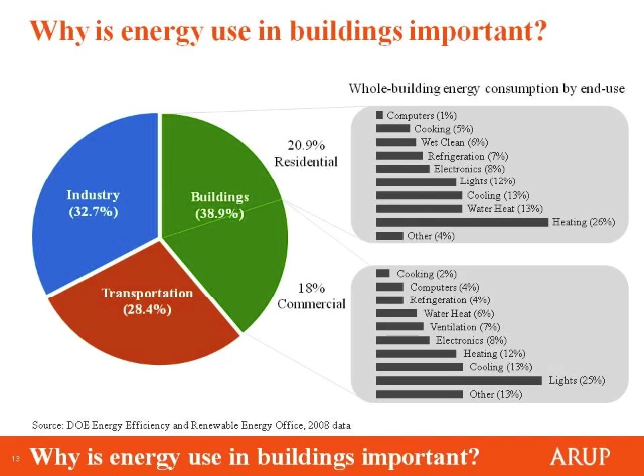So why is energy use in buildings important? Looking at it from the energy standpoint, this graph shows where all the energy is used in the US every year, and you can see that about 40% of the energy is used in buildings, and a good proportion of the transportation energy use is used getting to those buildings. You can also see there's a roughly even split between residential and commercial building use, but there's a huge difference between the way energy is used in each of the 2 building types. These are averages over the whole US climate, so some buildings are hot and some are cold.

I think you can see that for commercial space, lights and cooling tend to dominate the energy use. And in residential, it tends to be heating and the heating of hot water. Procter & Gamble actually did a sustainability study where they tried to work out which of their projects had the biggest environmental impact, and they concluded that the biggest environmental impact was actually in their washing powder. The reason was because everybody uses hot water to wash. So their plan was to figure out how to make a cold water washing powder, and that meant that although their process might use more energy, the overall energy use associated with the use of their product would go down.

So you have to think a little bit about where you can make a difference, and who and how can make that difference.

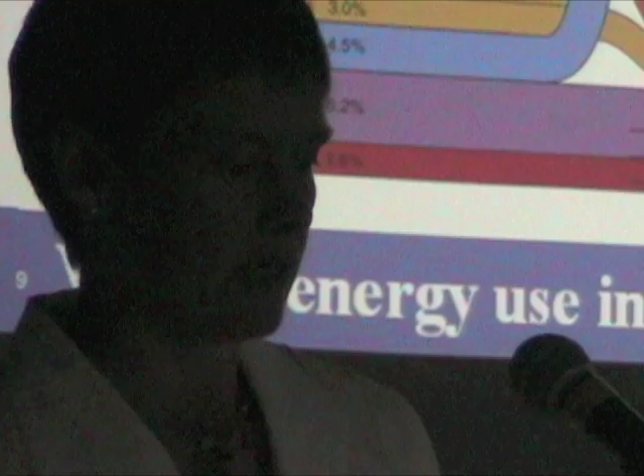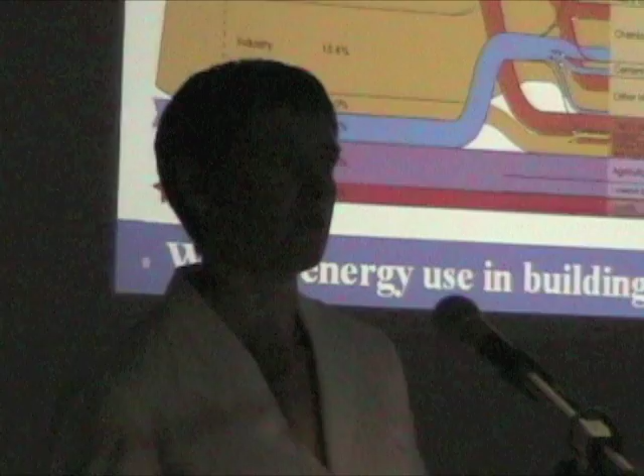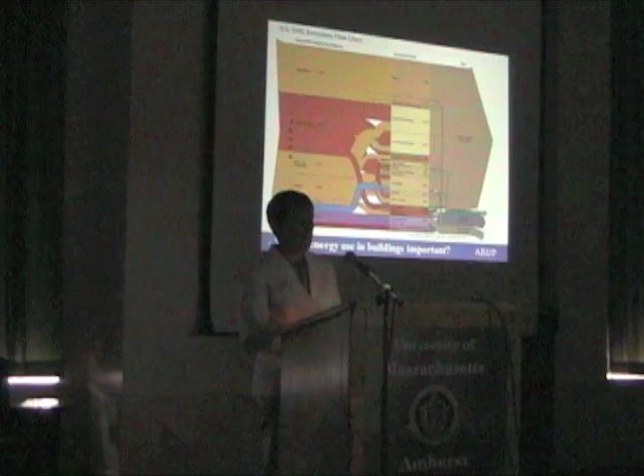The second thing I wanted to do was look at it from a carbon standpoint, and I know you absolutely can't read this chart, but I am a carbon emissions and climate change believer. I don't think I can have any more conversations where I have to explain that the sky is falling in, so there needs to be another way of communicating about climate change. I also know we're past peak oil and fossil fuels are finite, so there's an issue around energy. But it's important to recognize there is a carbon connection with energy.

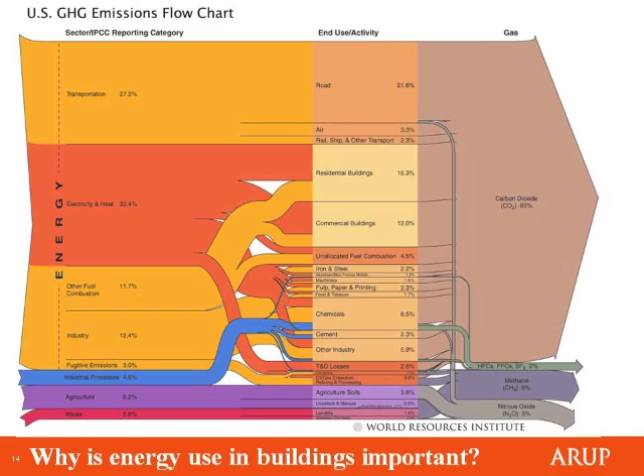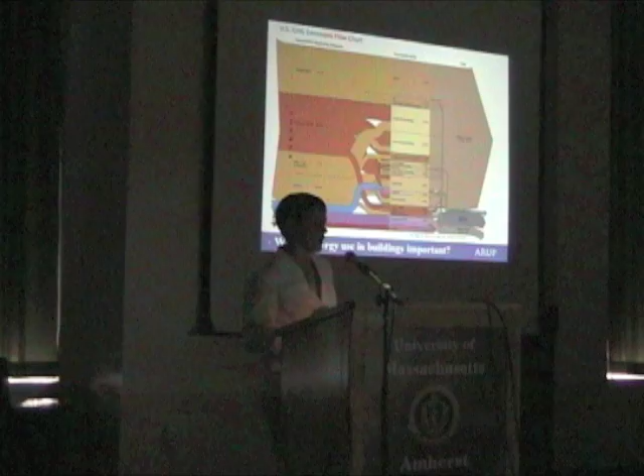The chart shows on the left-hand side, energy, and all of the other things that contribute to carbon emissions: energy, industrial processes, agriculture, and waste. On the right-hand side, you have all of the proportions of carbon emissions and where they come from. You can see a very big proportion of carbon emissions over the course of the year within the US comes from energy. One other detail: those two paler bars in the middle are the energy use associated with residential and commercial buildings. So similar to the previous slide, there's a pretty big proportion of carbon emissions due to energy use, specifically in buildings.

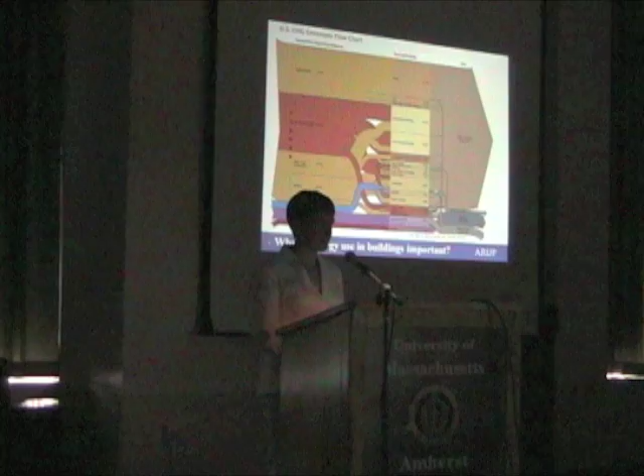Oh, that would be the wrong way. Just as an aside, because I live there, in densely populated areas like New York, transportation energy use is a much smaller contributor to carbon emissions than in the region as a whole, because the city is so small and so many people don't drive.

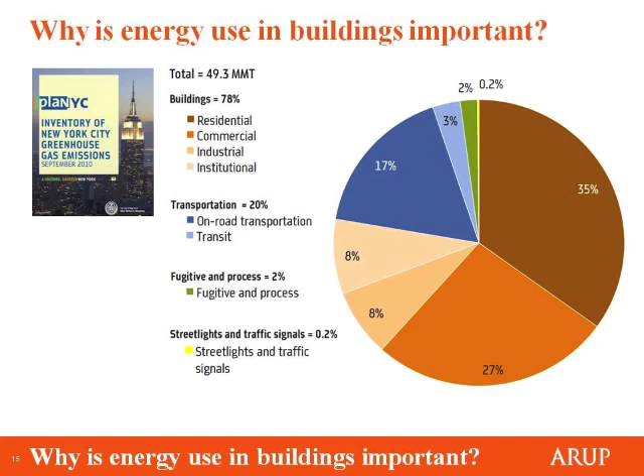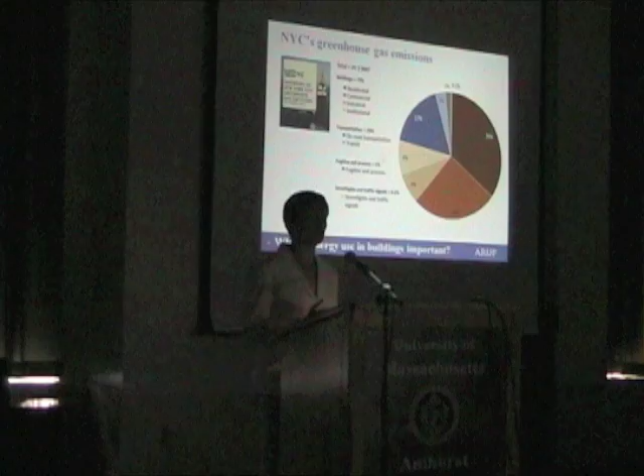If you draw a boundary just around the 5 boroughs, you can see the carbon emissions associated with transportation are those two blue ones, the 17% and the 3%, so about 20%. All of the rest of the carbon emissions in New York are associated with energy use, either in buildings or in streetlights.

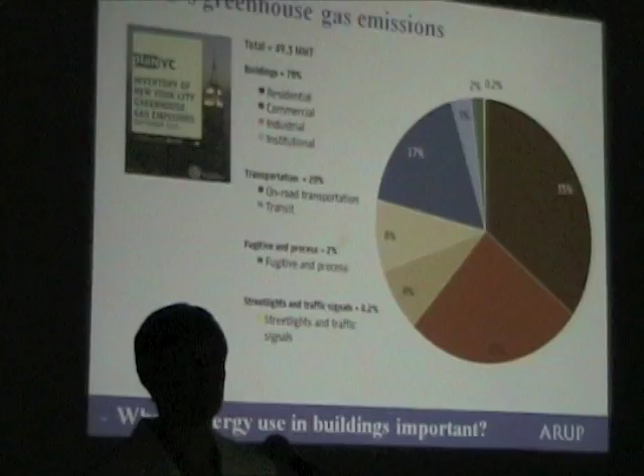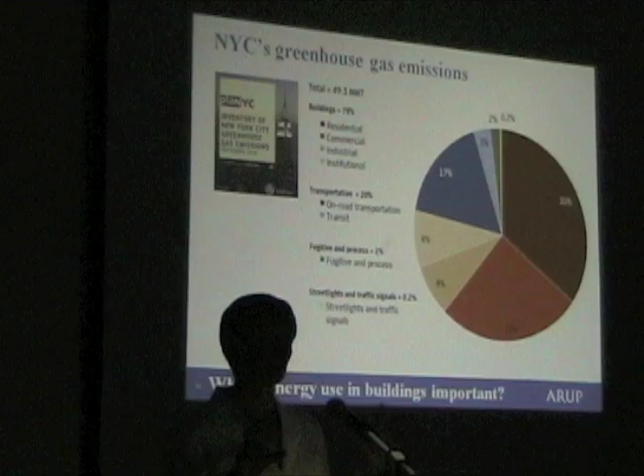The point I wanted to make here was about boundary issues. It's very easy for New York City to draw a boundary around the 5 boroughs and say, hey, look, all of our energy use is in buildings, and all of our carbon emissions are associated with buildings too. But they've forgotten to point out that New York City, without a lot of trucks coming in bringing food and materials for doing work, would not survive all that long. So this question of where and how you draw the boundaries around energy and emissions is a pretty key concept both in sustainability and energy. It's understanding what you are really accountable for.

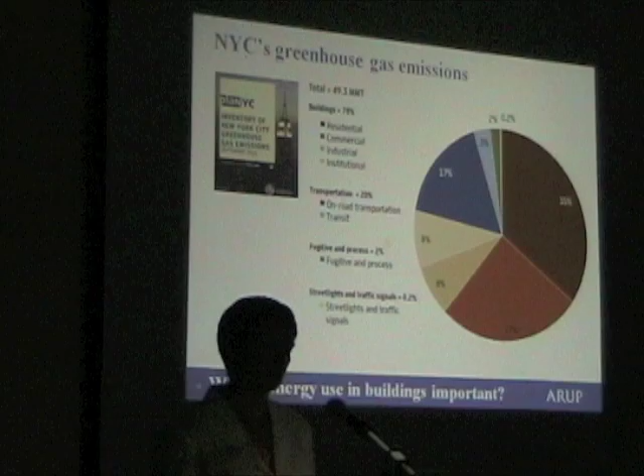So why are engineers frustrated about energy in buildings? Because for the most part they are. The first thing is that nobody knows what we're talking about. Energy is power times time. Energy is measured in joules, BTUs, kilowatt hours. Power is measured in watts and BTUs per hour. So power is the rate at which energy is used, is another way of saying this.

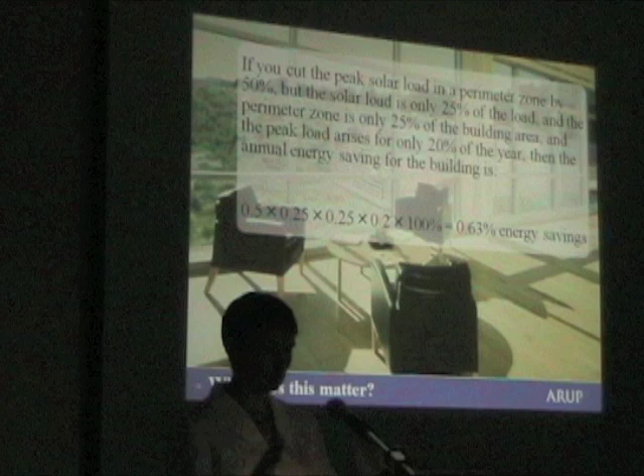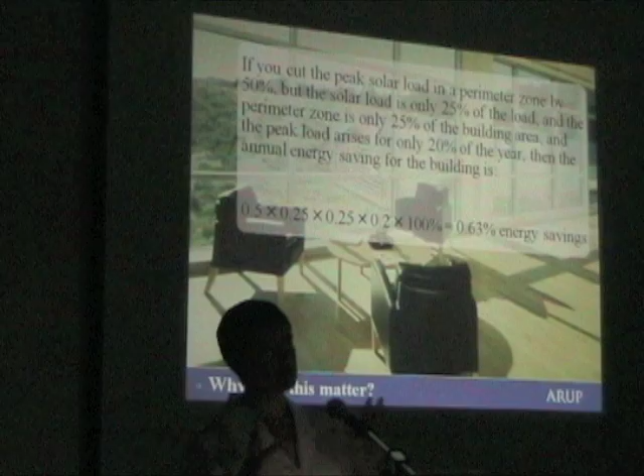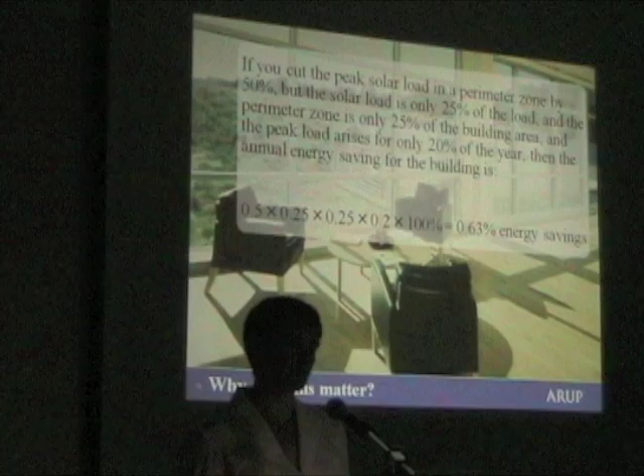Why should I care that I have to tell you this? This is a little complicated, and I know some of you are architects, but here goes. If we cut the peak solar load in a perimeter zone by 50%, which I think we'd all agree is huge and worthwhile, and work that through in terms of energy, the solar load is probably only 25% of the load in the perimeter zone. In a big American building, the perimeter zone is probably only 25% of the overall floor area. And the sun doesn't shine on a hot day for more than about 20% of the occupied hours of the building. So the annual energy savings for the building is 0.5 times 0.25 times 0.25 times 0.2 times 100%, which is a little less than 1%.

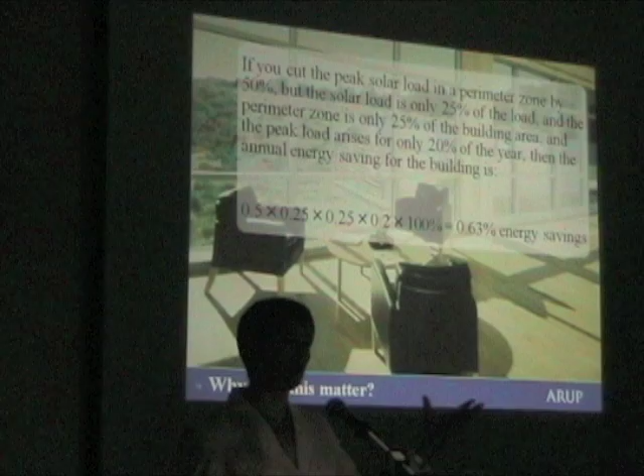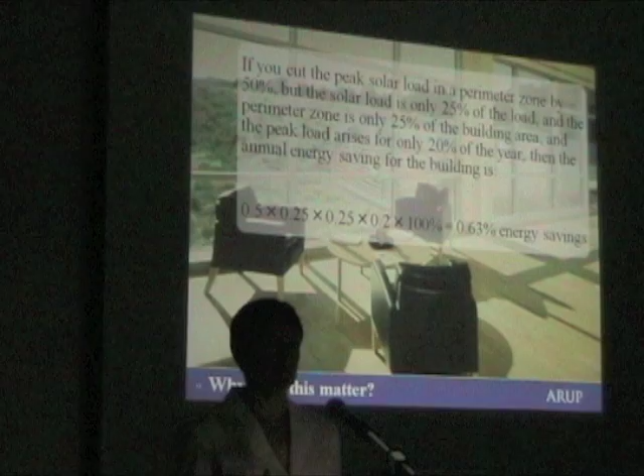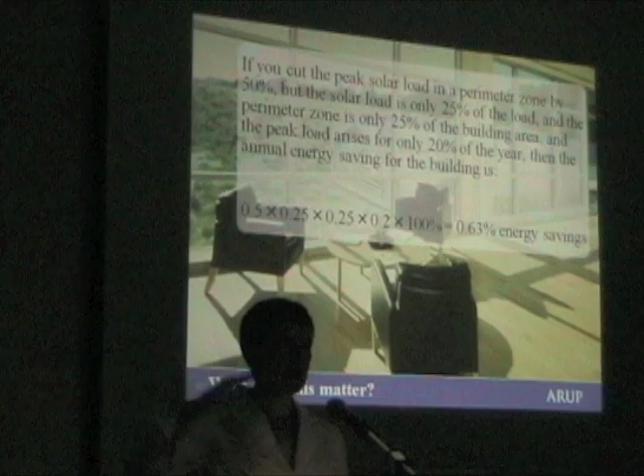So we shouldn't dismiss a percentage energy saving of less than 1%. We started this conversation with the idea that 50% of the solar load is reduced—that's a power number. Over the course of a year, that comes down to a 1% energy number. But my experience of modeling shows pretty conclusively that a 50% energy saving is actually made up of about 20 good ideas and correct decisions. So a 1% energy saving is actually pretty important. You need a lot of 1s and 2%s all the way through your building design process in order to hit 50%. There isn't any one thing you can do that nails your 50% right there. We should also absolutely not dismiss capacity changes and solar load reductions.

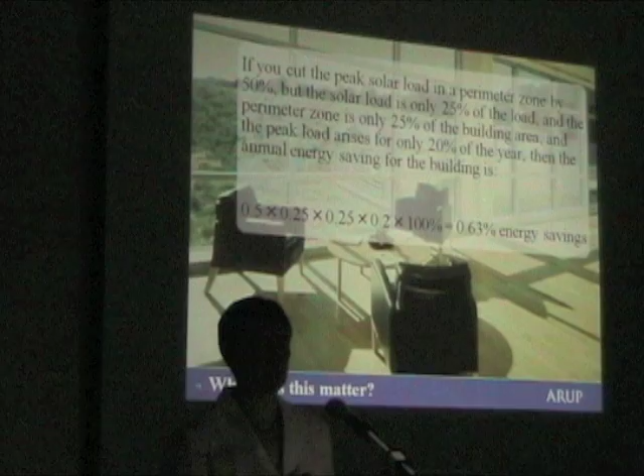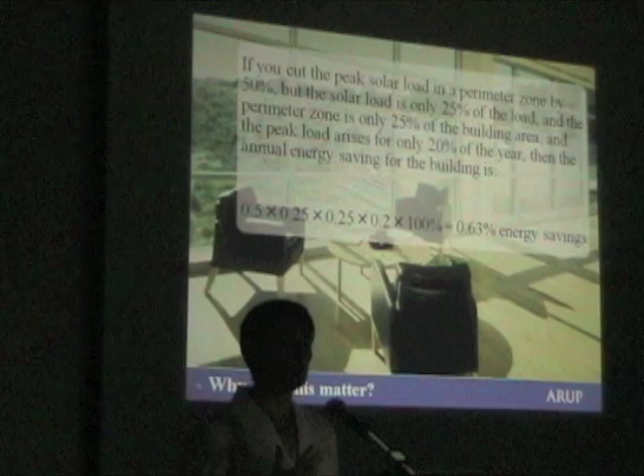One of the issues I've been coming across more and more recently, especially as energy modelling gets easier and everybody learns how to do it, is that everybody always asks me how much energy does it save. But that's actually often the wrong question, because the other relevant elements in HVAC design are comfort, glare, peak capacity, system size, space take, and all of those are influenced by a change in peak load. But almost all of them cannot be measured in terms of an energy saving or a definite payback period.

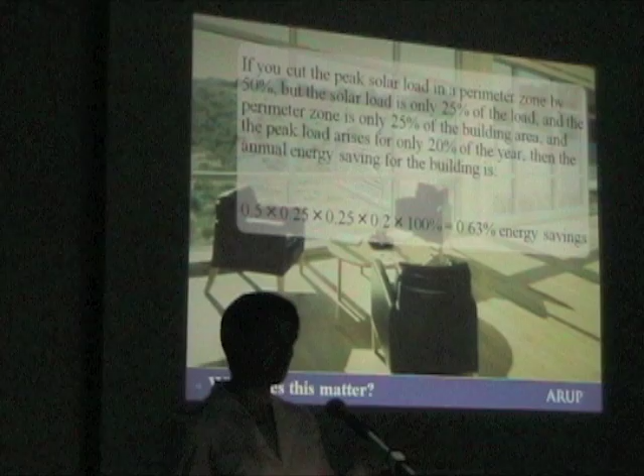So sometimes asking the question about energy is the wrong question, but it's the question we always ask. Not being able to separate energy from power, and understand whether it's a 50% cut in something that happens for an hour, or something that makes a difference every hour over the whole use of the building, is a huge mental leap.

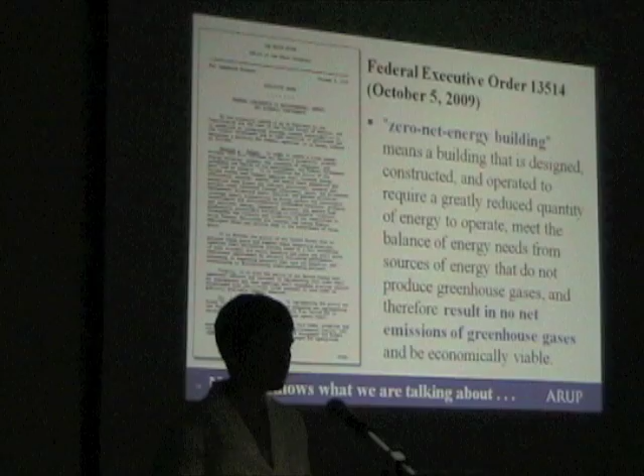So nobody knows what we're talking about. They don't know the difference between power and energy. The second thing nobody knows what they're talking about is they don't know how to define zero energy. When I say they, I mean we.

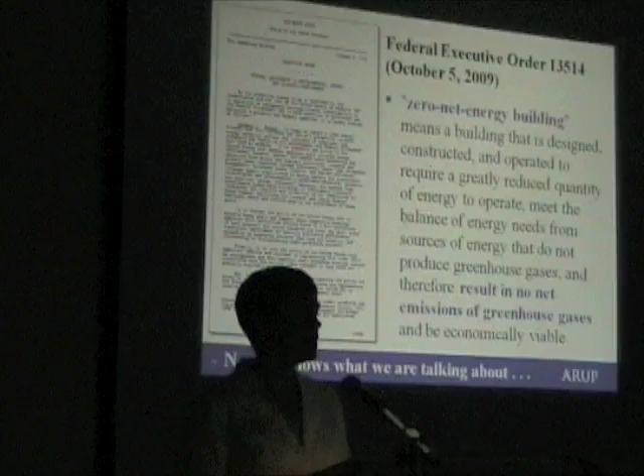What I'm trying to get at is this: the federal executive order definition may not seem obvious to you immediately, but it is a complete dog's dinner of a description. Zero net energy means a building that is designed, constructed, operated to require a greatly reduced quantity of energy to operate, meet the balance of energy needs from sources that do not produce greenhouse gases, and therefore result in no net emission of greenhouse gases, and be economically viable, just by the way.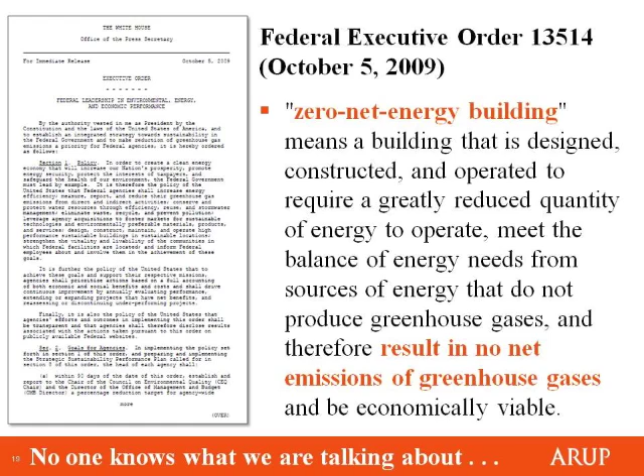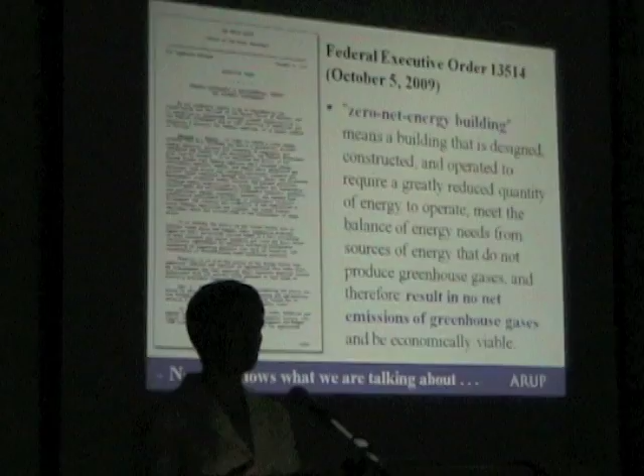So what they're saying here is that they're not really interested in zero net energy, what they're actually interested in is zero net carbon. And those two things are quite different. The fact that this definition is so screwed up, and that it's put forward by the federal government, means the whole industry is a bit confused about this. What is it we're trying to do? Are we trying to reduce the energy, or are we trying to reduce the carbon?

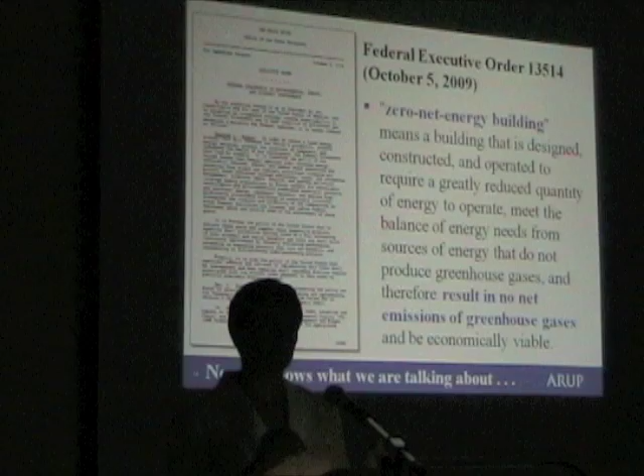My first project, that cafe, had solar panels on the roof. We didn't change the amount of energy the dishwashers needed to make hot water to wash the dishes. What we changed was how much that energy was going to cost, because we got it from the sun, and what the carbon emissions associated with it were. If you think about things that way, you realize you actually get driven to completely different decisions depending on what it is you're trying to reduce.

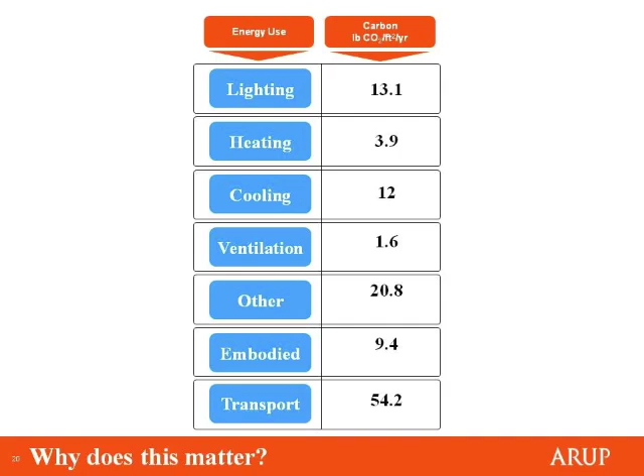So I had hoped this graph would be much more conclusive than it is, but it isn't, largely because I've got transport in there which outweighs everything else. But what I'd like to show you is that the carbon emissions associated with lighting are not the same as the energy emissions. When you convert from carbon to energy for lighting, it goes up, but when you convert from carbon to energy for heating, it goes down. There are all sorts of little anomalies like this, where electrical energy tends to be one thing, and the energy provided by burning fuel tends to be something different.

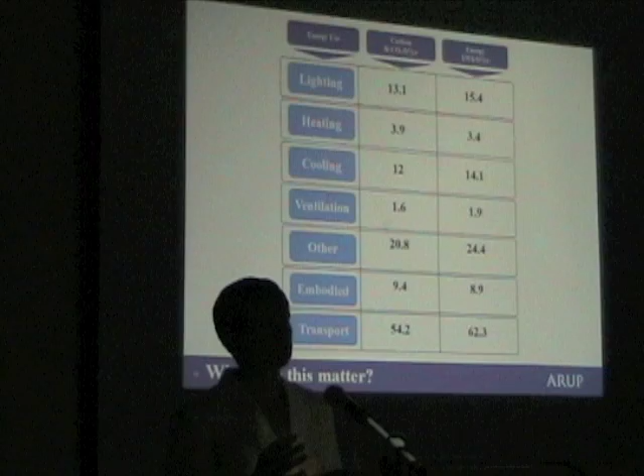The other thing that makes a difference is whether you measure it by site, as in what comes through the meter for electricity and the pipe for gas, or whether you measure it in terms of source energy, as in how much power gets provided to the power station to deliver that amount of energy at the building, compared to the amount of gas put into the building as a source. So there's a boundary issue, which is what I was trying to say about New York City. Measuring the boundaries and understanding where they are is a hugely complicated thing, but you have to sort out what those boundaries actually are.

So the third frustration for engineers talking about energy is that everybody is an expert, because I can guarantee every single one of you will have read some article somewhere that says, if we just put ground source heat pumps in, we would save X amount of energy. And that's not necessarily wrong, because ground source heat pumps can actually be a really good solution. But sometimes they're not, and on about 4 or 5 projects I've had to do an analysis to show that ground source heat pumps really don't work, when actually it was obvious by inspection in the first place, but my saying so wasn't enough.

We've produced the thing, we've rolled through the numbers. We could have actually spent that time doing something more useful, like designing a more energy efficient system rather than trying to put in a technology that didn't necessarily fit. The other thing I would say here is that all of these solutions can be great, but every single one of them will only give you 1 or 2 or 3% on your energy use reduction numbers for the building. So just because you've done this doesn't mean you've actually solved the problem. You have to go ahead and do a series of other things.

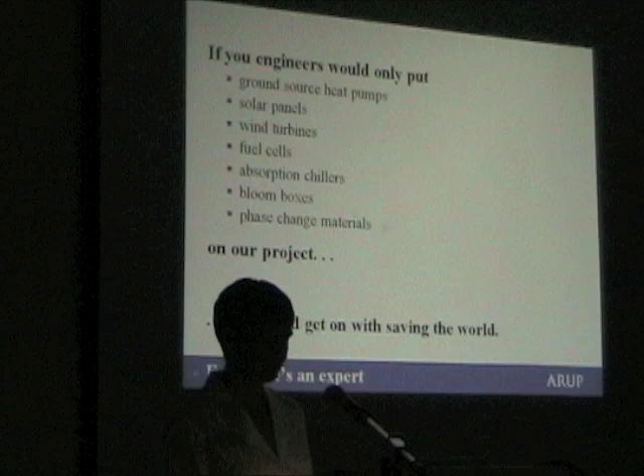So what are the things that I think you should know? There are 3 things I'd like you to take away from this. Don't design an all-glass building. It takes a little bit of everything to save the most energy, and the more energy you save in operations, the more significant embodied energy becomes. And in this particular case, you can substitute carbon for energy because it's the same equation.

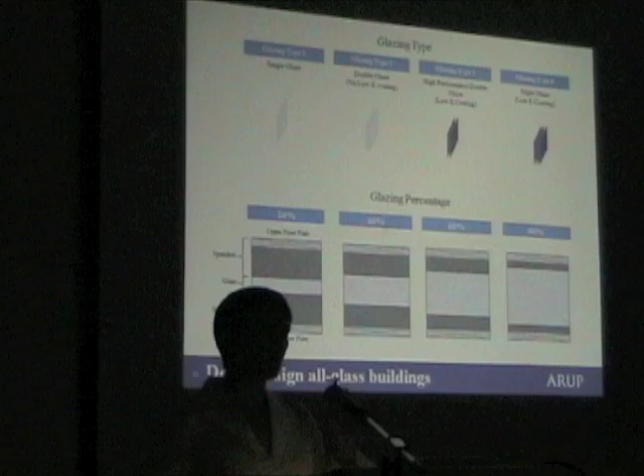So why shouldn't you design all glass buildings? Actually, the first reason is that the energy code says you're not allowed to. But there are a lot of them around. And if I had $1 for every time that somebody said, why can't I do an all glass building? There's one down the road and it works perfectly well, I would be rich, really rich.

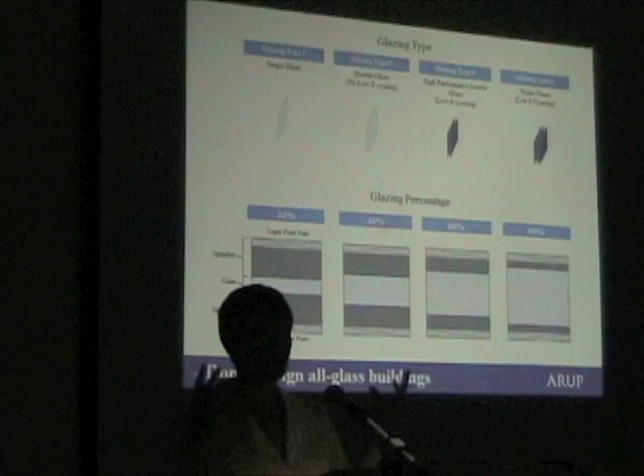So why does the energy code say what it does? We did a little bit of an analysis, a kind of outline, back of the envelope energy code analysis to understand why it is that the code says this and why it is that it is a sensible idea. So we did 4 different glazing types, 4 different percentages of glass, for 3 different climates and 4 different building shapes.

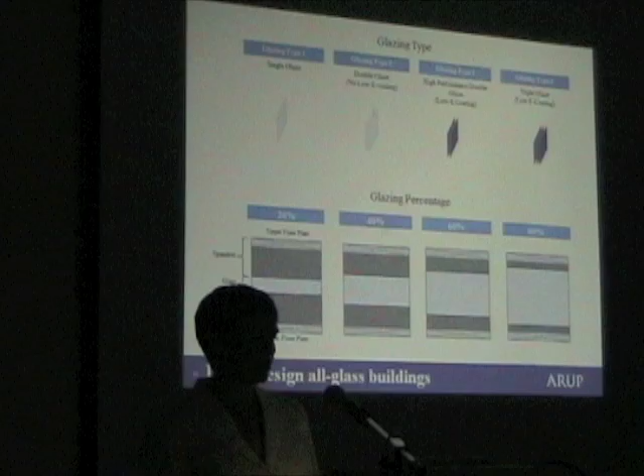What you're seeing here is the first 2 of those options. The 4 glazing types we looked at were single glazing, double glazing with a low E coat, and triple glazing with a low E coat. And the 4 glazing percentages we looked at were 20, 40, 60, and 80. That's what the diagrams show. We looked at a variety of shapes of buildings, but I'm going to present the results for the square one with the core in the middle, because that's the one that makes most sense.

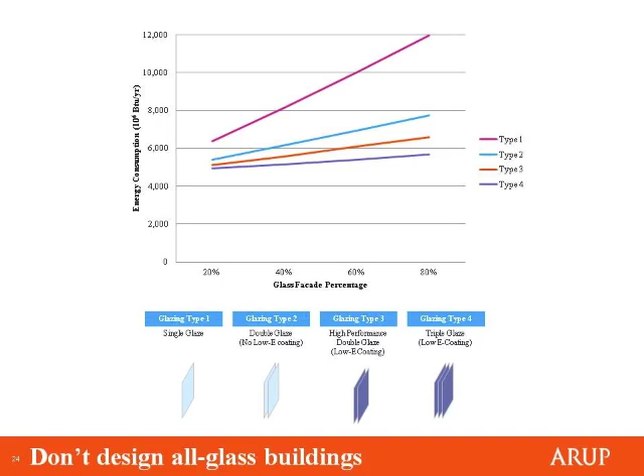So what can you see from the chart? Type 1 is the single glazing, that's the one on top, and type 4 is the triple glazing, that's the one on the bottom. The axis along the bottom is the glazing facade percentage, and the axis up the side is the energy consumption. So what you can see is that the better the glass, the type 4 glass is the best glass, the less the effect of glazing percentage, the difference between the height of the ends of those 2 lines. But it's still actually quite significant, and nobody puts in triple glazing. Most people actually opt for the blue line, the type 2.

So in the northeast, type 1 glass is actually essentially illegal, but I think you can see why from this particular presentation. You can see that it varies so much. The energy use varies so much if you use type 1 glass that it becomes very, very difficult to figure out.

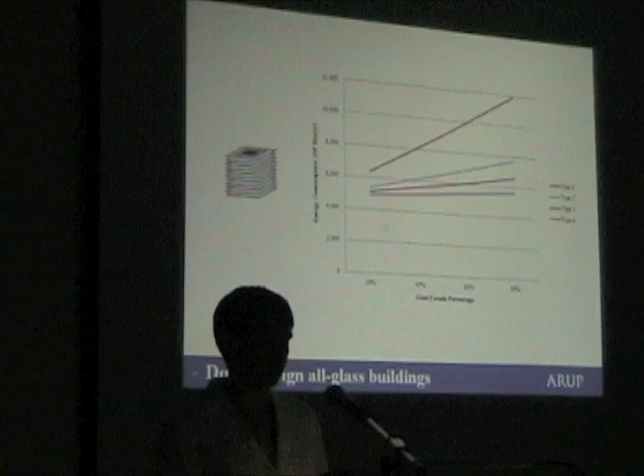So why not design all glass buildings? This is about prioritizing the priorities. We designed a residential building, where the architect said that the best thing about his building was that it had floor-to-ceiling glass, and that gave it an absolutely bitching view. That's what it said in the newspaper.

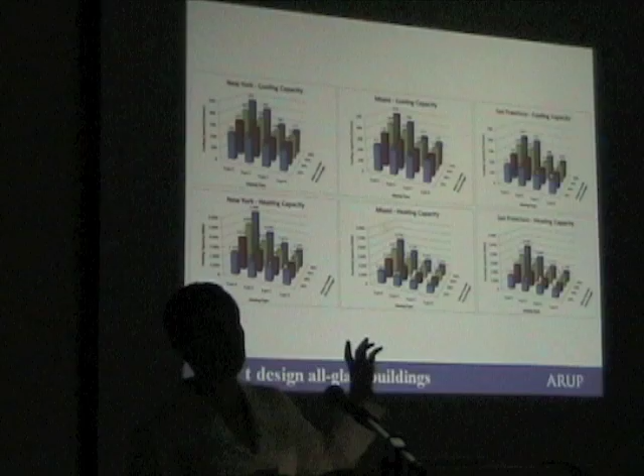If you have an energy goal, and by law you do, you also have to check which is the priority: do you want floor-to-ceiling glass, or do you want an energy analysis that's done correctly? You don't have to avoid floor-to-ceiling glass everywhere, you just have to limit where you put it, which means thinking about why and where you want it. You have to prioritize your priorities to get that right.

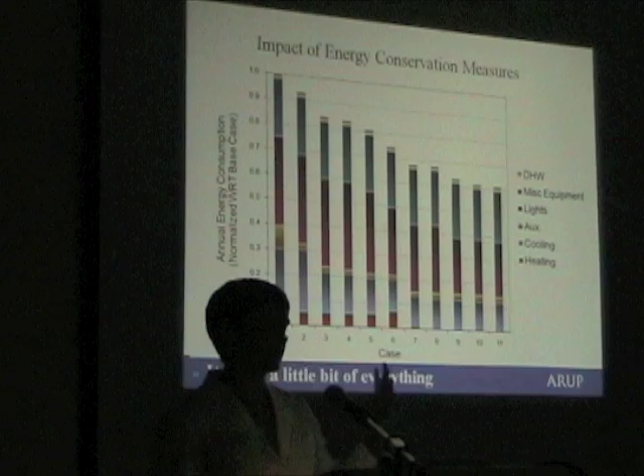So the first thing I'd like you to take away is: don't design all-glass buildings. They waste a lot of energy, and a lot of installed cooling and heating plant.

The second thing is that it takes a little bit of everything. I'm going to show you three examples, but this first is the model from a fictional building we made up for a zero energy study. It has residential, commercial, and parking within it, about 1 million square feet.

We looked at 13 different energy saving measures and combinations, including improved facade, daylight, low energy lighting, underfloor air versus VAV versus chilled beams, heat recovery, high efficiency motors, high efficiency chillers, high efficiency boilers, regenerative elevators, PV, and minimizing runtime. For every one of those changes we got a little bit. We did all 13 analyses and combined the ones that made sense together, which got us to about 55% of the energy use of the code-related building.

So it's clear that there's really no magic bullet. You have to do a bit of everything.

Once we'd done all of this, which is all about reducing the site energy—the energy that actually gets piped to the site—we then added a CHP to see what difference that made. That pushed the site energy way up, because we're suddenly operating a power plant on the building.

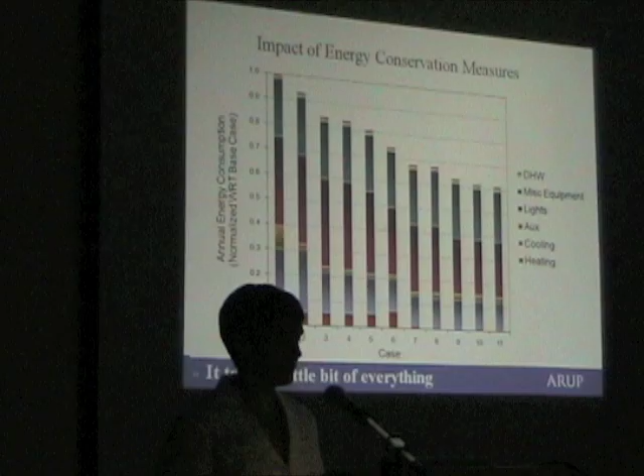But then we analyzed it in terms of source energy—the electricity that would have been coming from the power plant. Our CHP, where we reused some of the heating, was a much more efficient way of getting heat to the building than using a gas-fired boiler. So when you measure it in terms of source energy, the CHP actually made a big difference. We got this down to about 50% of the 2001 energy code.

To show it wasn't a fluke for Houston, here are some figures for London. This exact design won't be built, but these are the steps we went through, and it's a little more user-friendly because the charts are actually labeled. The first column is basically the standard design, what we thought we would do—a very energy-efficient standard design, but standard nonetheless.

Then we dropped the lighting energy load to about two-thirds of what code requires, and you can see we made a pretty big difference to the energy code indicator. We then changed the filters—instead of one big bank of filters, we doubled the area, which reduces the pressure drop, giving us another pretty big chunk of savings on the air side.

The nice thing about lighting and filters is that they affect the systems for every hour the building is operating. This building operates 24 hours a day, 7 days a week, so we got good savings from those things—small increments, but lots and lots of time.

We then looked at what happened to our carbon. EPC is measured in terms of carbon rather than energy. If we put in a biomass CHP, you can see we again got a very big drop, and we got rid of that heating energy load because we absorbed it into our CHP.

We then looked at what happened if we added photovoltaics, and there was a tiny additional drop. Then we looked at what happened if we put PV on absolutely every square inch of the site we could manage, multiplying it by 10, and we actually started to make a pretty big inroad into the overall carbon emissions of the building.

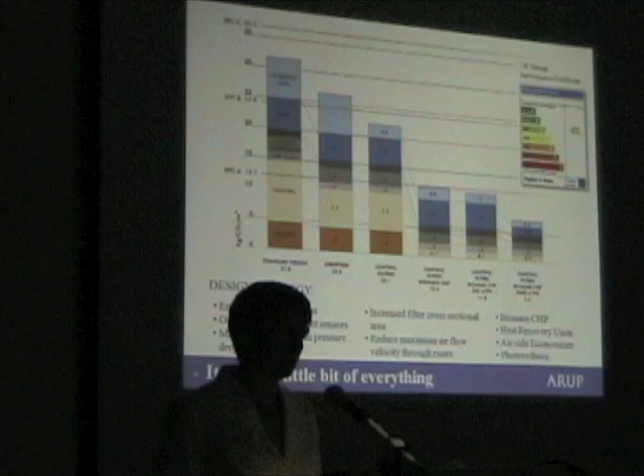So there are a lot of things in here, but again the changes look more dramatic than they did for the other example. That's partly because it's measured in terms of carbon rather than energy, and because we put the biomass in there. But to get down here, we had to do some things that are pretty extreme—a little bit beyond what current practice actually is for buildings.

And then I said I was going to show you three. Here's number 3. These are some figures we generated for a current exhibition the AIA is putting on in New York. We wanted to know the effect on overall energy use of decisions made at different stages during the design process.

The first one was a fictional building where we just tried everything. The second one was a real building with a zero carbon goal, so we were aiming for carbon rather than energy. This one is about where in the process decisions are made that actually allow you to make the changes.

The first decision was about site, and the bottom orange bar is about transportation. We compared what happened if we put the building we were designing on a greenfield site versus on the corner of 30th Street and 9th Avenue in Manhattan. Moving it from one to the other changes the transportation mode from being all single-person car to being primarily public transit oriented.

If you look at the figures for public transit versus personal car, the energy use and carbon emissions associated with the location of the building show that the biggest step you can make is to build in urban areas with public transport systems.

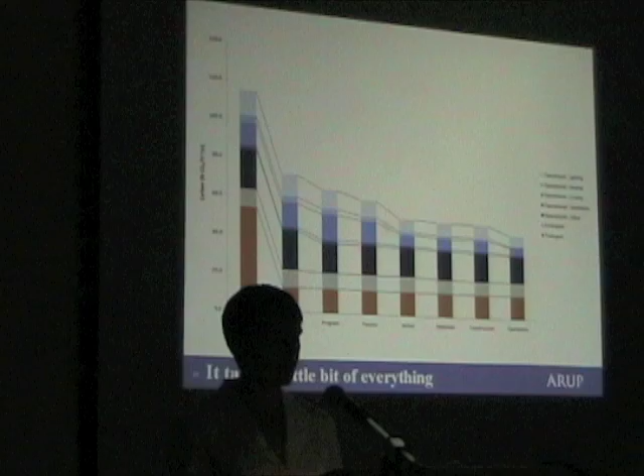We then looked at materials, just to see whether there was anything there. We looked at the construction process, and then at operations. This chart also includes an embodied energy component.

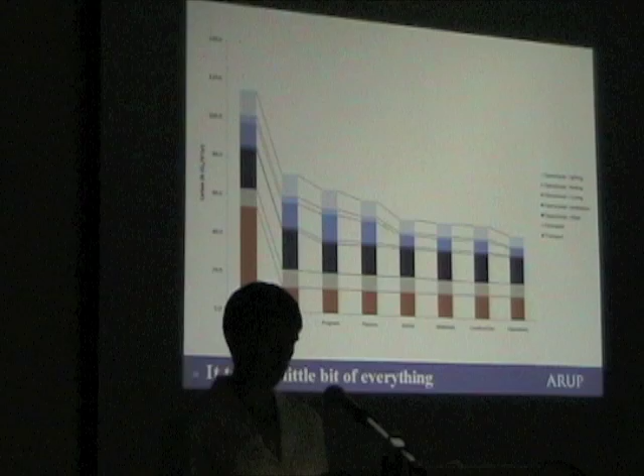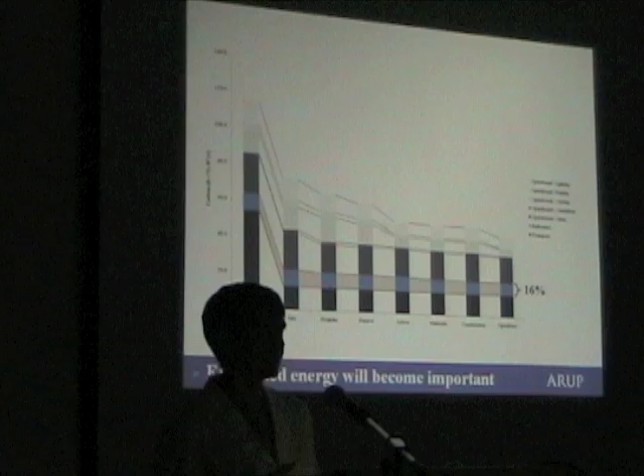So this was the slide showing what we were thinking about at every stage of the project. This next slide shows where the embodied energy is. If you look at the beginning, this blue bar on the first item is actually pretty insignificant. But by the time you've driven down all the energy uses for operations, the carbon emissions, the energy, the embodied energy and embodied carbon associated with the building actually become quite a significant component of the building itself.

So the metric we developed was what we called the annual total carbon footprint, which included the transportation for people getting there, the building operations itself, and an amortized amount related to the embodied energy in the building.

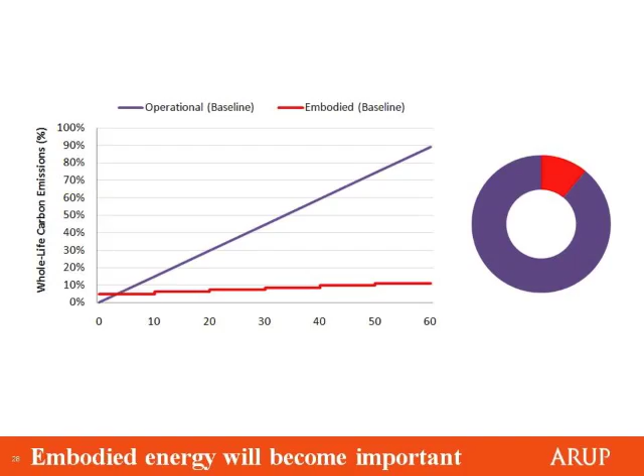So how do you get the embodied energy or embodied carbon of a building down? This is a piece of work we did, again a bit theoretical. The red line at the bottom shows the embodied energy. You can see that every 10 years we assumed you had to do something to the building—buy a new chiller, paint the walls, move the partitions around—something that increases the embodied energy pretty significantly.

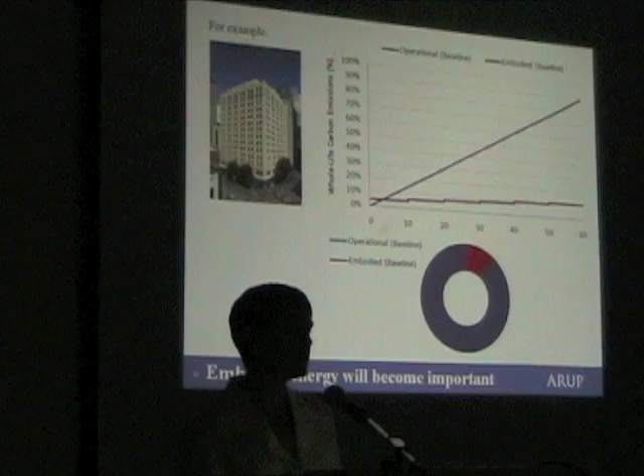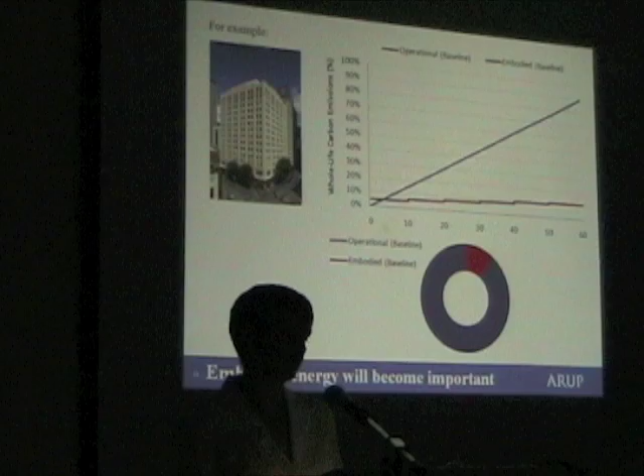The purple line is the operational energy. At the very beginning of a building's use, the operational energy is way less than the embodied energy. But there's a crossover point after about 2 or 3 years of building use, where the operational energy and the embodied energy become about the same. The longer you extend the life of the building, the more significant the operational energy becomes.

One of the most powerful things you can do with buildings to decrease their total annual energy footprint or carbon footprint is to make them last longer. So that's what this slide says: please make your buildings last longer.

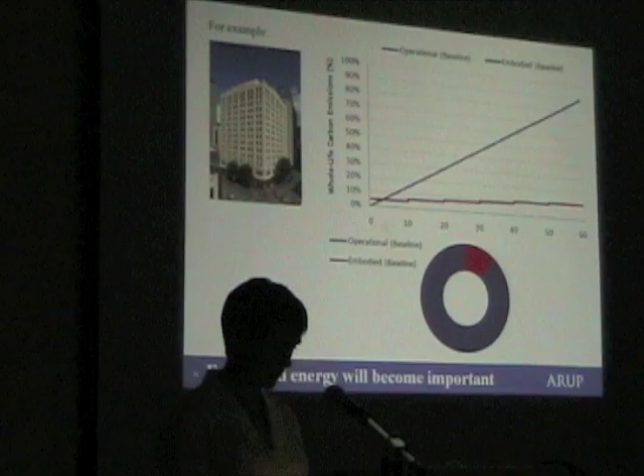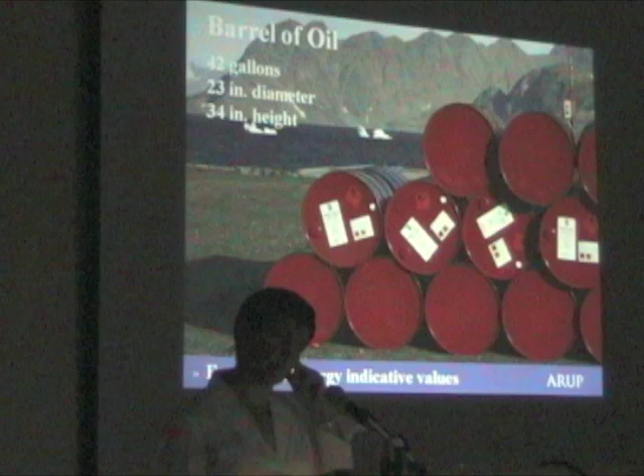Finally, because nobody ever really shows these figures and because they're fun, we looked at how much embodied energy you actually put into individual materials. The metric we used was barrels of oil, since it's visualizable and makes a difference. So here is a set of barrels of oil sitting somewhere scenic, probably Alaska, given the icebergs in the background.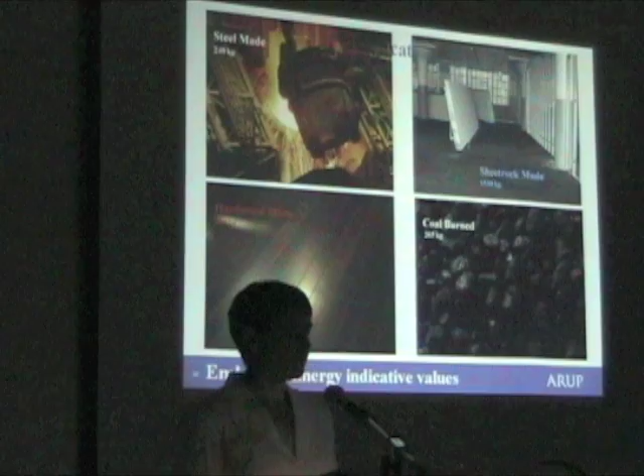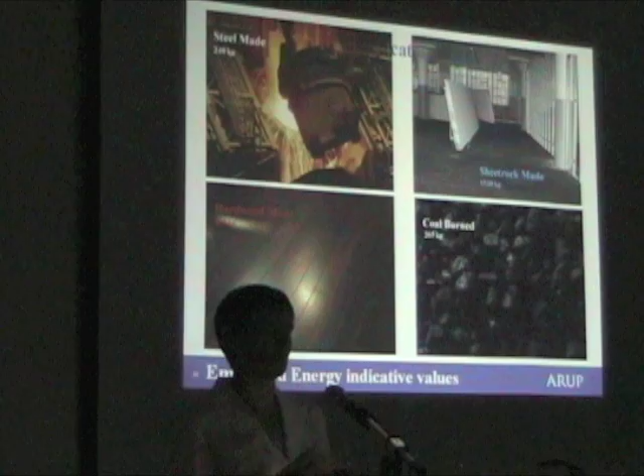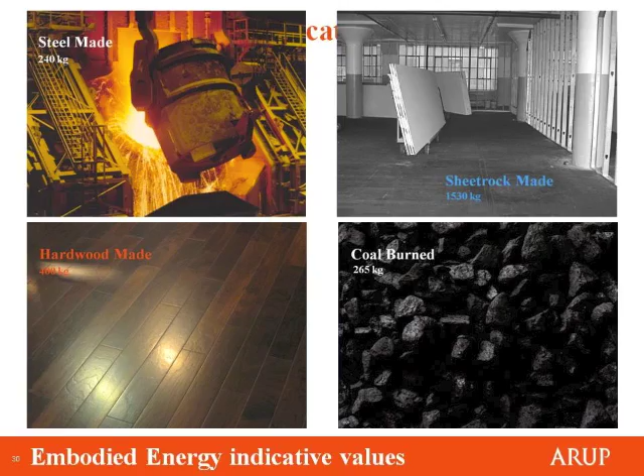With every one of those barrels of oil, you can make some materials: 240 kilograms of steel, 1.5 tons of sheetrock, 400 kilos of hardwood, which of course is all about transportation, or you can burn 265 kilos of coal. So you can begin to see from this the relative energy density of coal and oil, and why oil is so much preferred.

You could make 200,000 cups of coffee. We just did the boiling of the water; we didn't do the harvesting and transport of the coffee. It was just the boiling of the water.

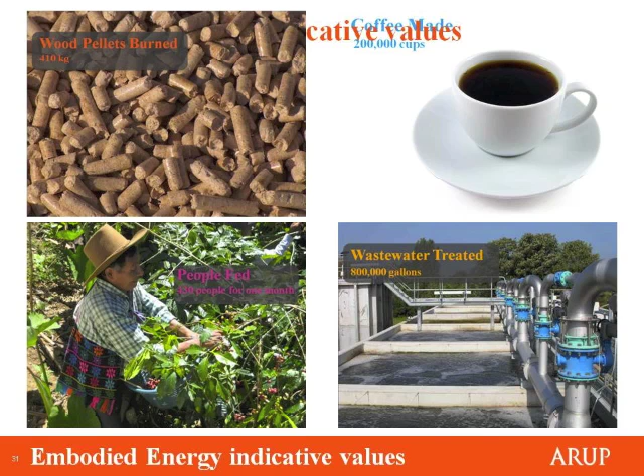You can treat 800,000 gallons of wastewater. You can feed 430 people for a month. What we did there was just calculate the calories that 430 people would take in over a month and equate that to the energy in a barrel of oil. We didn't look at the food miles or the embodied energy in that food. We just looked to see.

It was for fun. And we also figured you could burn this many kilos of coal, or this many kilos of wood pellets. So this is really just to give you an idea of the different magnitudes of things you get when you start looking at how much embodied energy is in a particular thing.

So that's my whole presentation, and I think it's question time.

It would be good if I could see you. Probably good if you could see me too.

Fiona, can you talk a little bit about your process with the project in Caledonia, and how you went through and developed the systems that would cool these buildings? So the answer is that the system we put in was actually a fan coil unit.

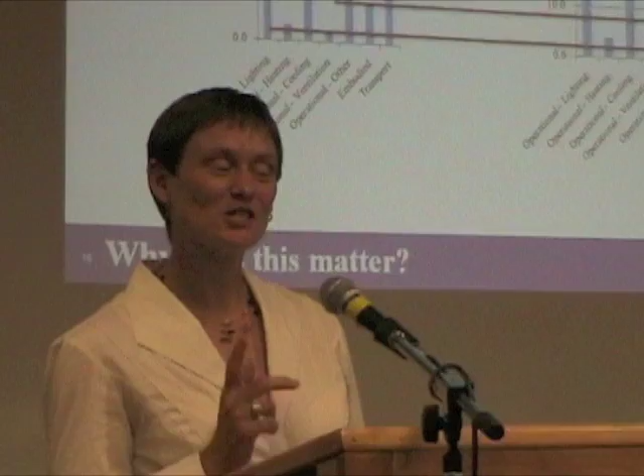This is the graphical data from the table on the slide before that shows how those comparisons work. What I was hoping was that I'd see something more different between them, but I didn't, partly because I think when we calculated the numbers, we used source energy and source energy and carbon tend to be somewhat similar. Whereas if you compare site energy and carbon, you get a big multiplier on the electrical results. So that's why this isn't as conclusive as I had hoped, and it's my fault for getting somebody else to put the numbers together for me.

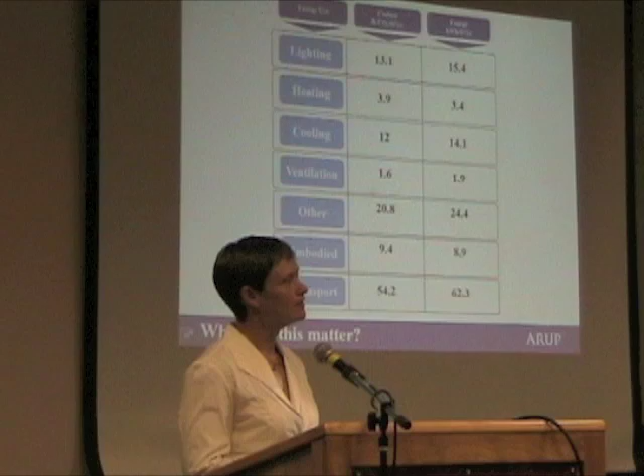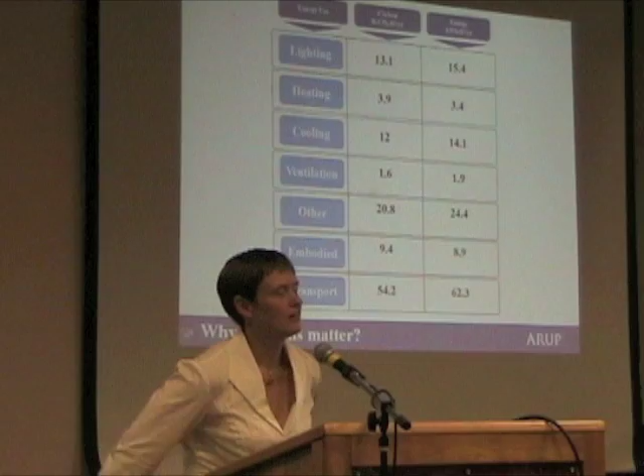What comes to mind for the best performing building you've ever taken part in design and construction, and in terms of actual performance, measured performance, and how did it get there?

One of the problems with my job is that we never actually go back and measure what we did. We do everything on the basis of what we think it's going to be, and I don't think that's necessarily a bad thing. If we didn't do the calculations to see which would be more energy efficient, you wouldn't end up with more energy efficient systems. But what happens is it's unusual for us to go back and measure. The clients don't want to pay, and we certainly can't finance it.

One answer to your question would be that actually Stanford did call us back. We did an energy model for them that showed they would use X amount of energy, and when they opened the building, they found they used 2X. So they said, what's going on here? And called us back and said, well, figure it out.

So we built a further calibrated energy model, which we calibrated to the current building energy use. And then we did a baseline energy model that took the calibrated model and looked at what the baseline would have been. What we discovered was that they were operating the building for twice as many hours as we had predicted in the energy model. And the biggest single determinant in how much energy is used is how many hours you operate the systems for. So when we did the calibrated energy model, we actually found that the energy saving was twice what we had predicted, because the baseline energy use was so much higher.

So I think that's actually a very interesting lessons learned story for us, that we got to go back and understand what we did, and our conclusion was that our energy model actually wasn't bad. It's just that we didn't have the right data when we put it in the first place. And there is a general misunderstanding about how accurate those energy models can be. We say things like, well, they're plus or minus 10%, and that's right, but only if you get the assumptions correctly. And that's often just not properly known.

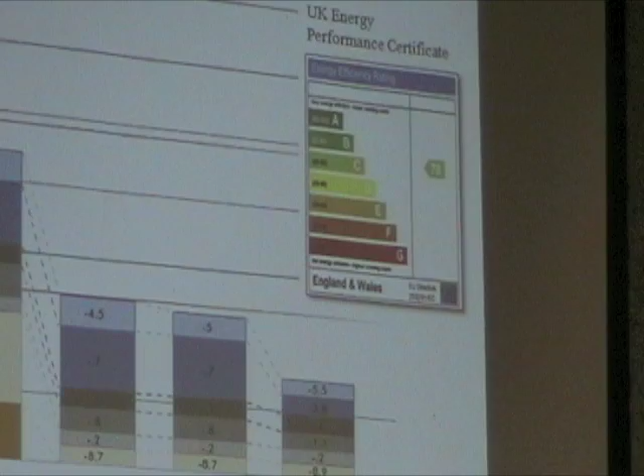That thing up there in the top right is an energy performance certificate, a display energy certificate. That's what you get on your building, a little chart that says you're green if you're at the top and red if you're at the bottom. That's a benchmarked energy use for your actual building. They require that it's right there, and you definitely have to produce it if you sell a building, even a residential building. In New York City, there's now legislation that every building over 50,000 square feet has to put its energy and water use into a database.

It actually uses Portfolio Manager from Energy Star, and that's not public this year, which the code official described as a mulligan. We'll give 2011 a mulligan, and in 2012 you have to put your energy and water data in, and it will then be published 6 months after the due date. So there's beginning to be more of a move towards publishing some of this data, but it's very piecemeal, very much on a city-by-city basis.

Can't remember what else I was going to say. There was something. Sounds awfully radical for the United States. Yeah, I think it's a little difficult.

The answer to the other question you asked, about the best performing building I've ever worked on, is probably Yale School of Forestry, where we have some measured energy data. We think we use about 25% of the energy that the code says we're allowed to use, through building design and efficient systems, ground source heat pumps with standing column wells, and some solar thermal and solar PV. KBTU? Don't know off the top of my head.

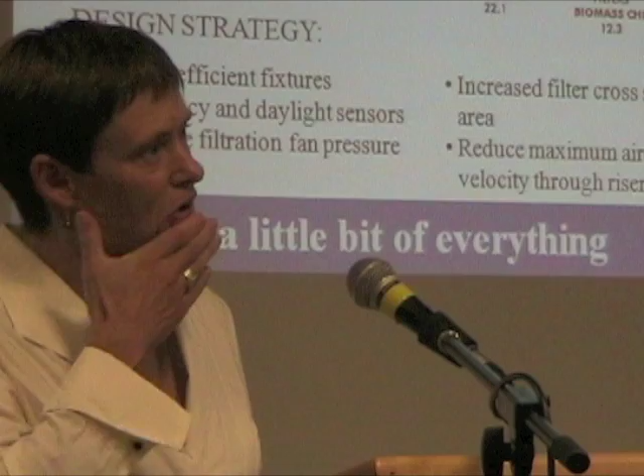And so when you are approached by someone along a more traditional course where there's a lot of architectural work, design work that's already been done, and you feel that it's really compromising a lot of the opportunities for energy savings, how do you share this information?

Well, that's when how you communicate all of this actually becomes most difficult. I would say that I have been lucky for my whole career that I have always been involved at the beginning of schematic design. I've never had to wait until the end of DD or even the beginning of DD. And I think that if I had, I might have a different view about what's correctable and at what stage.

Given the importance of heating and lighting in the overall energy picture, particularly in residential buildings, the skin of the building is clearly significant in all of this. Your rule about not all glass has some significance, but all of the kind of extraordinary insulation that is now becoming part of the LEED's view of the world, you haven't really emphasized that here.

One of the reasons is that most of my professional work has been in commercial buildings, and very little of it has been in residential buildings. If you look at projects like the Beddington Zero Energy Development, which is a project from the mid-90s that Chris Twinn, one of my colleagues, led, they did a great deal of analysis about building envelope and how much effect that has. And the Beddington Zero Energy Development, BedZED, has 12 inches of insulation between 2 leaves of brick.

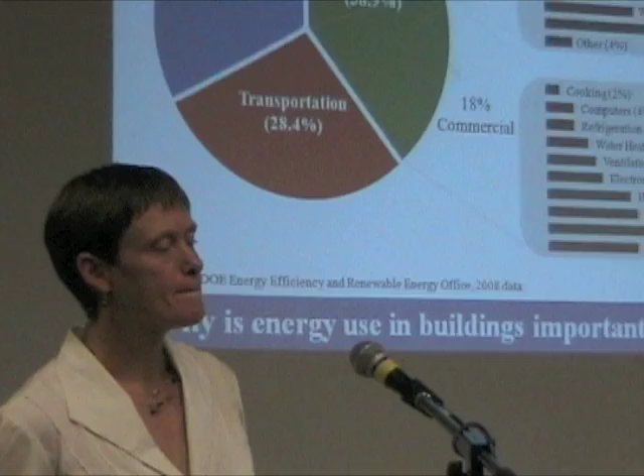Back to the pie chart about the total energy usage of the different industries, or the energy usage from industry, from buildings, and from transportation. Can you foresee a sizable decrease in the building chunk, or perhaps maybe if we were looking at CO2 emissions rather than energy?

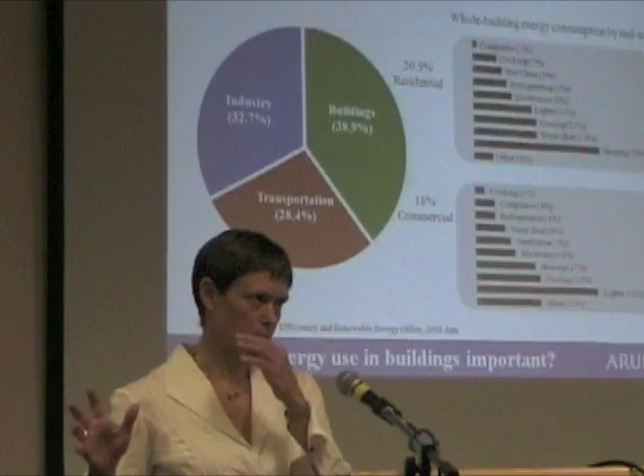Yeah, this. If you look at CO2 emissions and you look at source energy, they are actually more or less similar. So you only get a mess with the difference between energy and carbon if you do it at the building level. So I don't know whether I see a change in the proportions, because I think that the transportation people are actually also working very hard to get their carbon emissions down, and the building people are trying to work pretty hard, and the industry people always work hard because it goes absolutely to their bottom line. So this ratio may not change very much, but the size of the pie might.

At least it might not grow faster. It tends to grow when the economy is growing, and shrink when the economy is shrinking. I have a chart that shows energy use compared to economy size, and the lines just track.

This one's actually for the US as a whole. So New York City shows 80% of the carbon emissions or source energy use is in buildings. This is done on source energy terms, so you could turn this into barrels of oil. It's about the energy input that goes to the various sources, so it's not really weighted, it's just the sum.

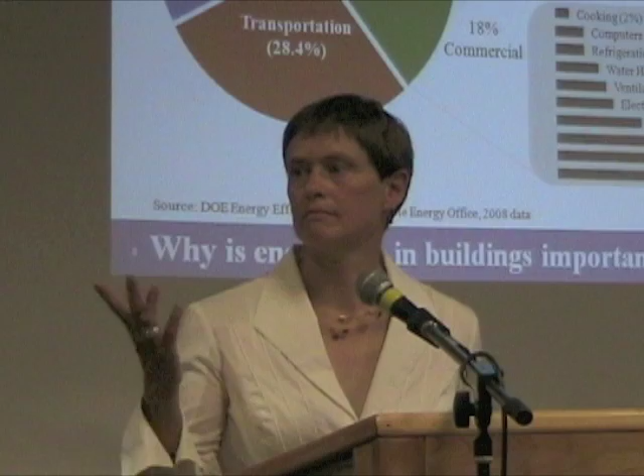Have you looked at passive survivability as one of the criteria in designing buildings, so buildings can survive, other than in Caledonia, for some period of time without the systems running at all? It's generally not a strong criterion unless you've got some reason to make it so - in Caledonia it was absolutely primary. In most other buildings, we look at the level of redundancy and resilience if it's important. Most office buildings, it really doesn't matter if they shut down during a hurricane, power cut, or flood - you just deal with it afterwards. The types of buildings where we worry about it are museums, galleries, data centers - things you want to keep running or at least shut down slowly if there's a disaster and bring back online quickly afterward. So for those buildings we begin to look at resilience, and passive survivability is always a component of that, although the brute force method is preferred by most clients.

Going back to the net zero building, the last sentence about making it economically viable - on the slide where you showed the different modifications from the baseline, do you have any information regarding which ones are cost effective? Because it just kind of showed the drop. Do you have anything that ties into cost?

On this one, we did everything we thought we could do with current technology, which is why we got stuck at 60%. We did lighting - this was 2006, LEDs weren't really a possibility, so I had T8s and T5s in there as an option. Everything else was stuff we thought could pay back, though it wouldn't necessarily, since we didn't look at the other side of the equation. That's the fun thing about a fictional building. For this one, we did have to look at payback.

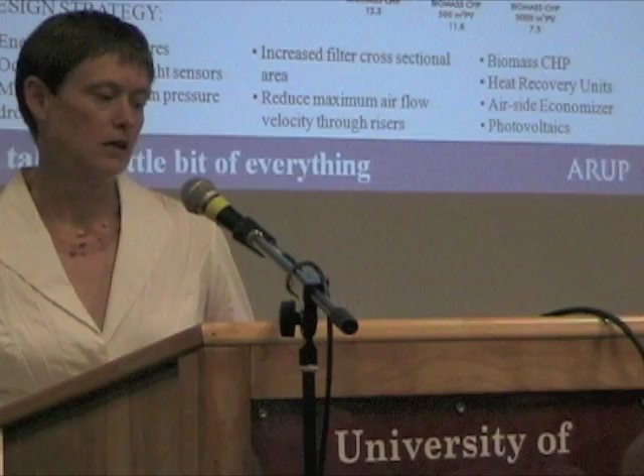CHP doesn't pay back, there's no question about it. If you're interested in reducing energy, you would never do a CHP. If you're interested in payback, you'd never do CHP. But if you want to get to carbon neutral, then suddenly CHP is a huge component of how you'll probably get there.

It depends on where you are and what you monetize. In carbon terms, the CHP can help you get there. In energy terms, sometimes it does and sometimes it doesn't. And the LEED models aren't much better because they actually measure energy in terms of cost, which is also a pretty poor metric.

I'm sorry, I'm an architecture person, so I've got kind of a dumb question. Can you explain what a biomass CHP is for us ignoramuses? So a biomass CHP is a combined heat and power plant. It produces heat and electricity, and it produces it using wood pellets. That's the biomass bit. There are other forms of biomass, but that's what we used in this particular case.

On the previous slide, each interval seems to decrease in energy, except for case 6 with E down there. I don't know if you remember specifics of this. I don't remember what I put in each one of these.